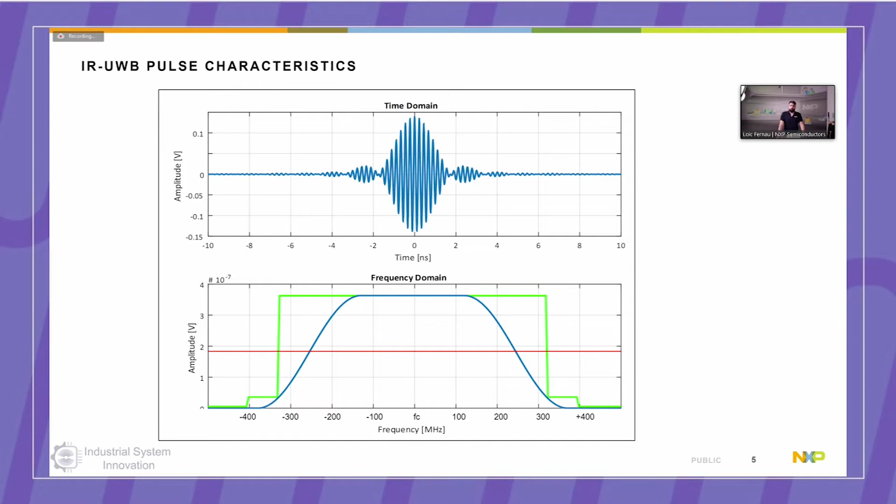This makes ultra-wideband very accurate by enabling it to have a very accurate time frame of when a signal is received and when the signal is transmitted. So you can very accurately measure the time of flight of a given ultra-wideband signal.

And it also helps a lot in multipath environments—environments with lots of obstacles and other hindrances in the area—because in the normal line of sight condition, the signal that is received first should always be the direct path signal. And this signal should also always be the signal with the highest amplitude. If that is not the case, then we might be in a non-line of sight condition, because the signal that doesn't come first, like the second or third signal, has the highest amplitude.

So there must be something blocking the way of the direct line of sight signal. By differentiating between line of sight and non-line of sight signals, ultra-wideband is able to be used in multipath environments.

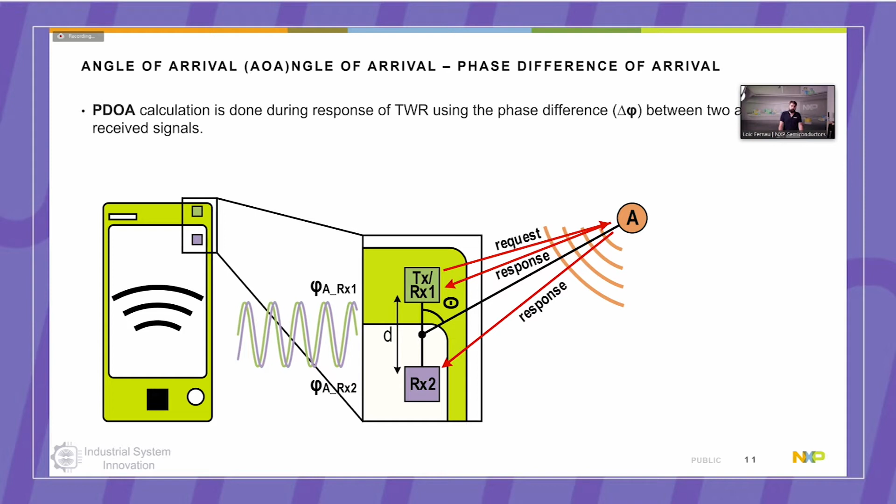It's based on phase difference of arrival. So we measure the phase difference of a signal that is received by two antennas. Okay, but what's the point? In the end, with our ultra-wideband system, with the angle of arrival plus the distance measurement, we can very accurately measure relative position. It's with a distance information of plus minus 10 centimeters and an angle information of plus minus 3 degrees.

This can be used then for precision navigation, for follow me use cases, for convoying, or other things that are done indoors, outdoors, without GPS and with GPS. I will show you some follow me later. But there are also use cases for identification, where you have a pilot or someone else going to a drone, and via the secure ultra-wideband connection, the pilot can identify himself to the drone or something similar.

Asset tracking would be an interesting use case, but also last meter delivery, where a rover that is carrying some payload connects to a customer, and then based upon the ultra-wideband system, will securely know the position of the user and move to him.

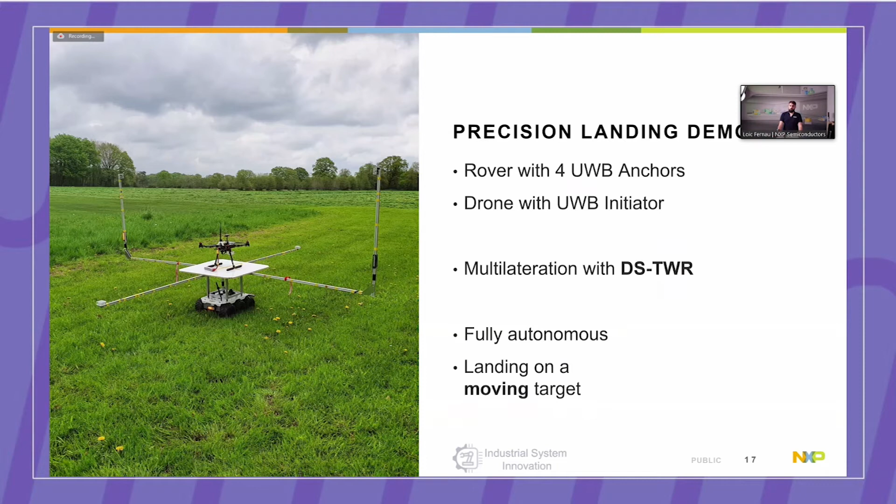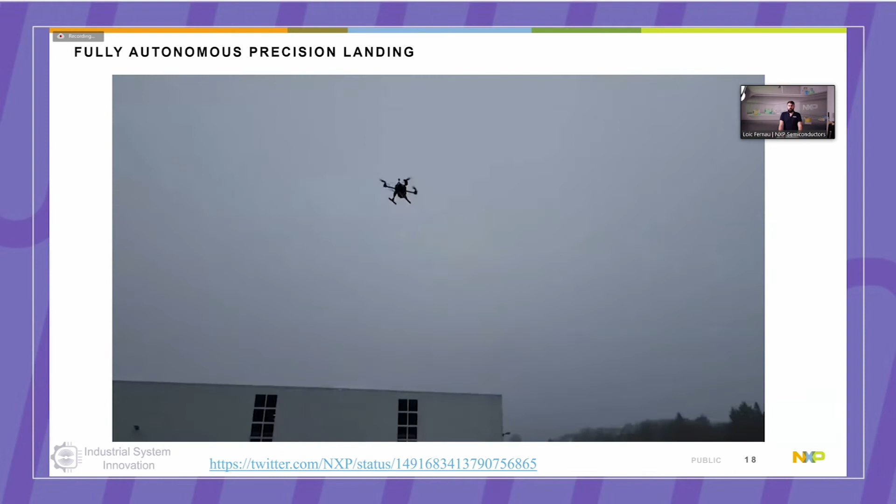I hope the video starts now automatically. Yep, that should, yeah. This is fully autonomous flight, outside of course, but it could also be done indoors, where the drone lands on the rover. This is the first thing I've worked on with ultra-wideband for mobile robotics.

And the next thing is part of my bachelor thesis. It's about ultra-wideband Follow Me, where I equipped a rover with ultra-wideband and enabled it to follow me. So what we have here is an ultra-wideband device like this one, and the rover equipped with ultra-wideband. I will show you it in a second. You can also see it in the picture, of course. The rover is measuring the distance and angle information coming from the ultra-wideband ranging part, and then uses a very rudimentary body control to publish actuator controls on the rover, so that it can enable indoor follow me.

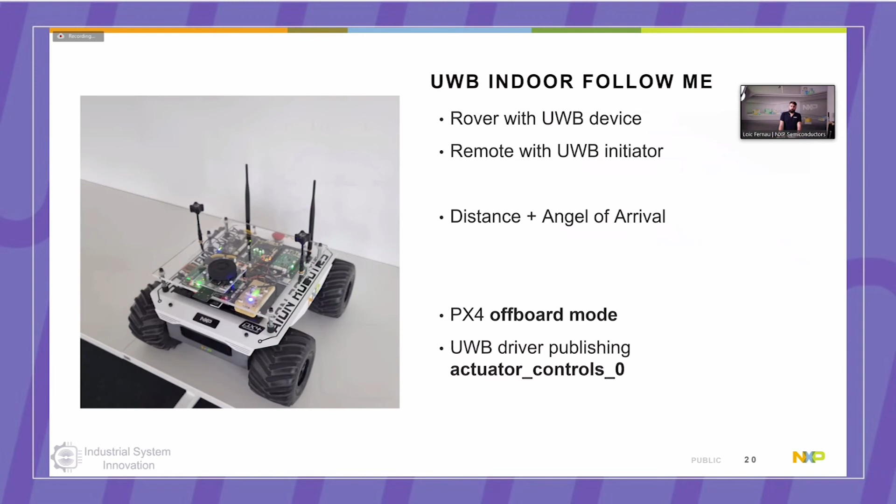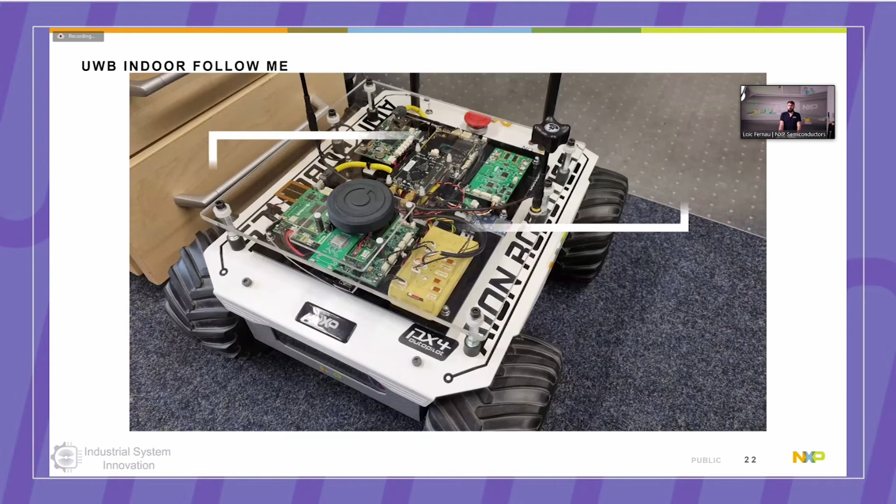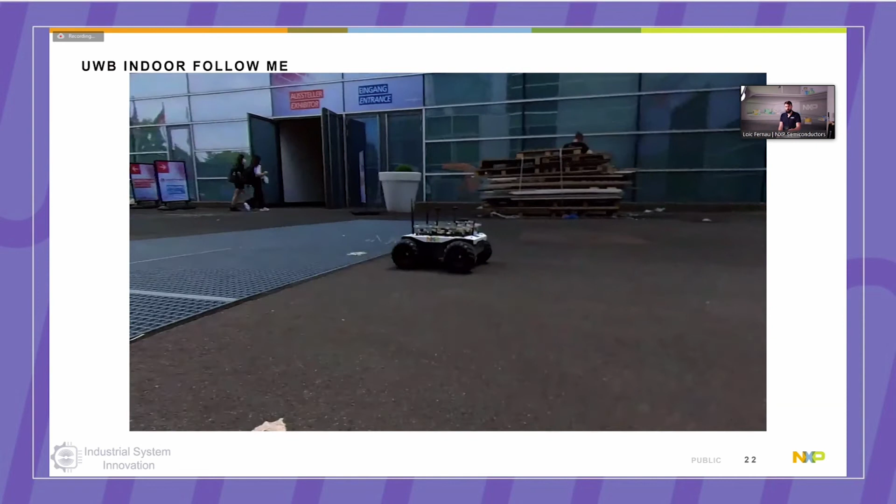This video was made at the Embedded World Show that happened this week in Nuremberg. And as you can see, there's again a look at our rover equipped with ultra-wideband. And now you should see the rover drive. My colleague Gerald is equipped with ultra-wideband. He has this ultra-wideband initiator clipped to his pants, and you can also see the remote control for the rover in his hands, but he is not using the controls. The rover is just following via the ultra-wideband system.

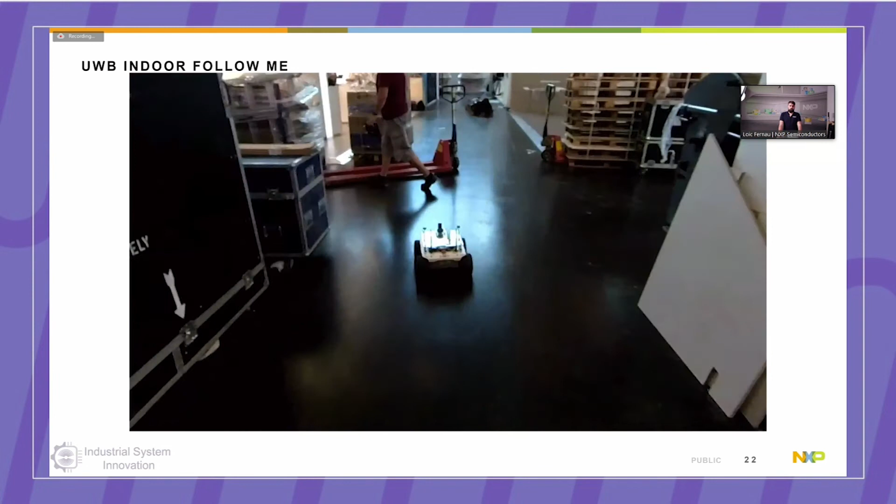And as you can see, even with a very rudimentary body control system I made in a day, and just using the distance and angle information from ultra-wideband, the rover is able to follow very, very accurately.

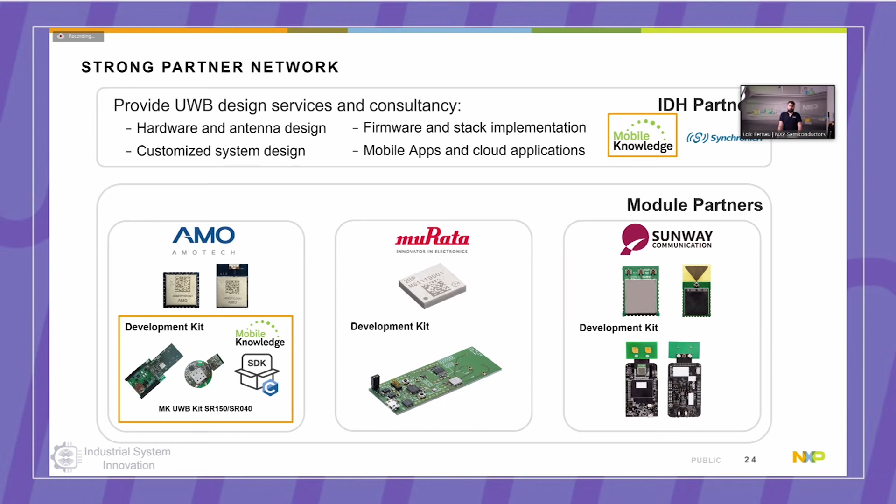Okay, how to get started? We have a strong partner network of module partners who supply the ultra-wideband modules, like Amotech, Murata, and Sunway. And we also have some design partners like Mobile Knowledge, who are building a development kit that you can buy to enable various ultra-wideband use cases. Included in the kit are some demo use cases, and enough hardware to get a feel for it.

Mobile Knowledge also offers engineering support and other stuff, and they're a great help.

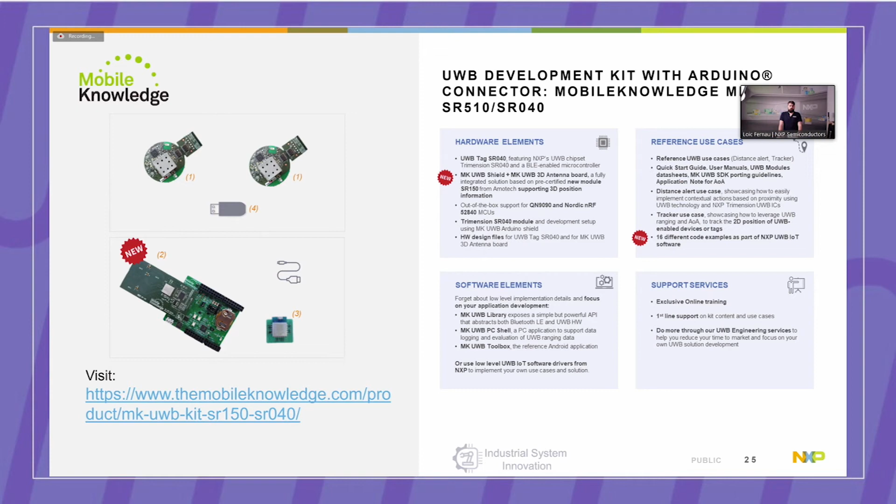Yeah. I want to show you one very nice thing. This is the new NXP Trimension SR150 using 3D angle of arrival. This is what I used on the rover, because this board can do very accurate angle of arrival in more than 2 dimensions, in 3 dimensions, and the rover you just saw was fully made with this, and the angle of arrival accuracy is way better than expected.